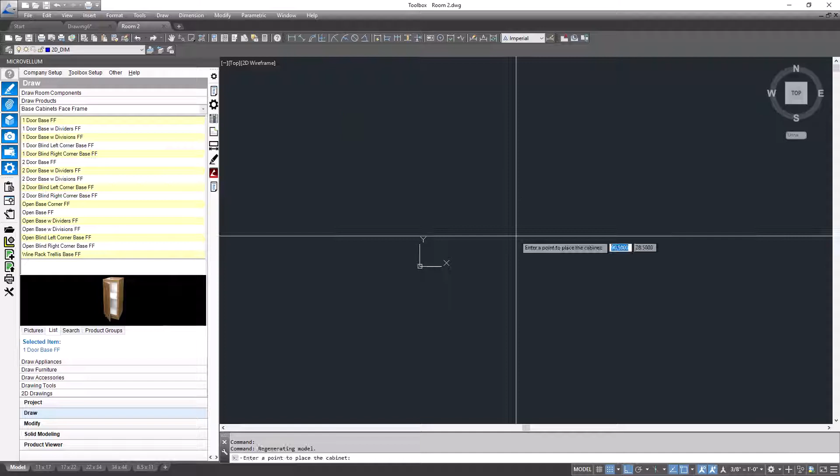And on this cabinet, we have the ability to control all the details of the face frame as far as what type of construction it is. In this case, I've chosen a routed bead face frame, so we can do just a square face frame with the edge, or in this case, we'll put the bead on there.

We can do a radius, and that could be customized with additional moldings and options for those face frames as well. So here we can see our face frame overlays as far as where we're lapping this cabinet. We've made everything flush to the inside of our case here, and we've got our stile and rail widths for those that we can control and set the details for.

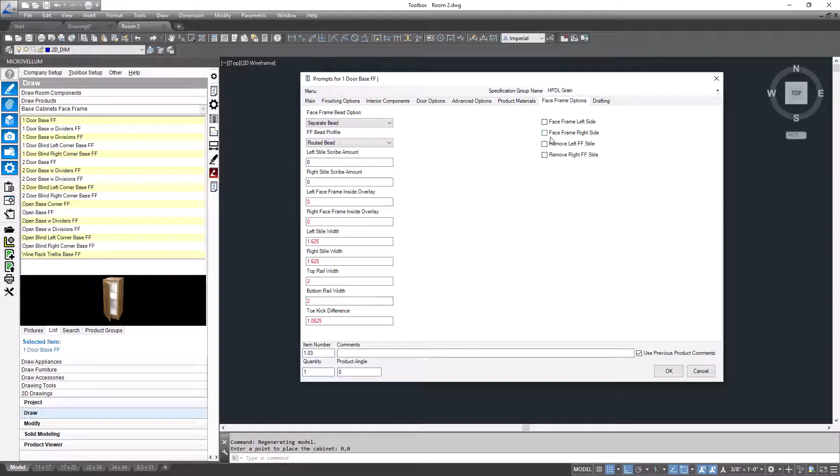So when we go draw that, we can see we've got our face frame drawn here with our cabinet and our MDF door inside of that, and so all of that can be designed and machined inside of Microvellum.

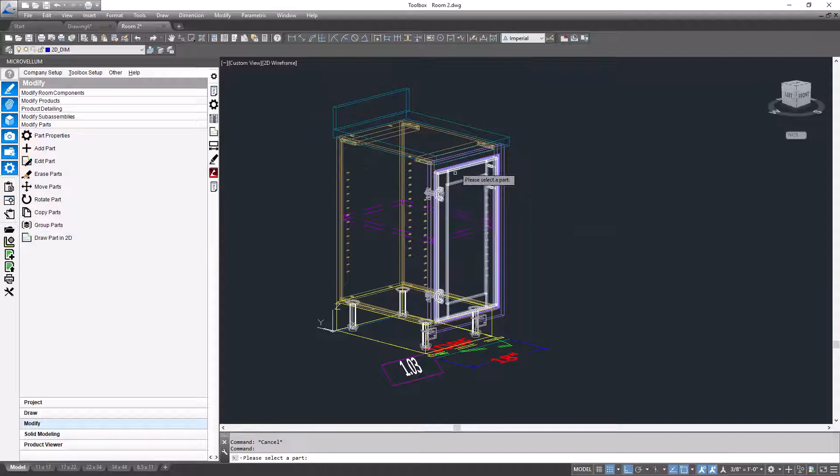So if we want to see exactly how that's going to come through into the CNC, we can just grab that part. So here's our one-piece face frame, and here we can see we've got a cutout, and then we've got two passes for the beaded frame. And there's a detail of our beaded frame there, so you can see we're coming in with a veining bit in order to cut that bead profile into the MDF.

So we can use that same application for a single cabinet or for a multi-carcass starter. So here we have a category of product starters, and those are just openings that we can use. And in this case, we're going to use a multi-carcass to use individual boxes with one large face frame on the face.

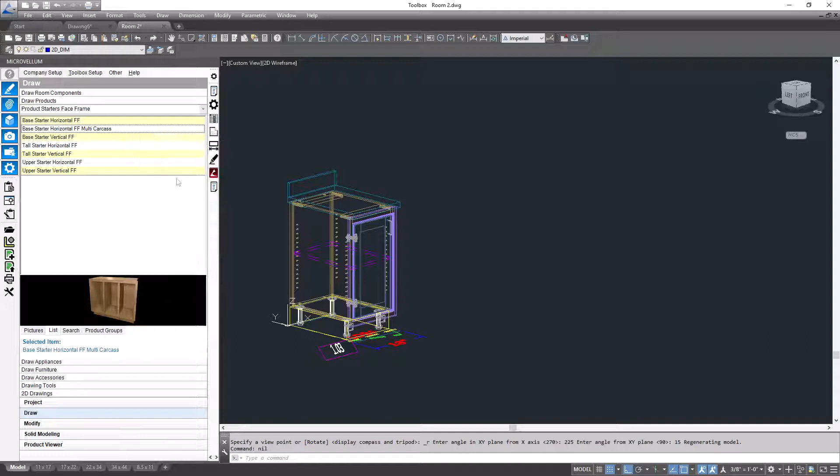And so inside of this product, we can specify as many different bays as we want. So we can do something like a 108 inch, 9-foot face frame if we have the material for that. And we'll say that it's got 4 different bays, and we can come in and specify in each of those bays what the detail is that we want to have in there.

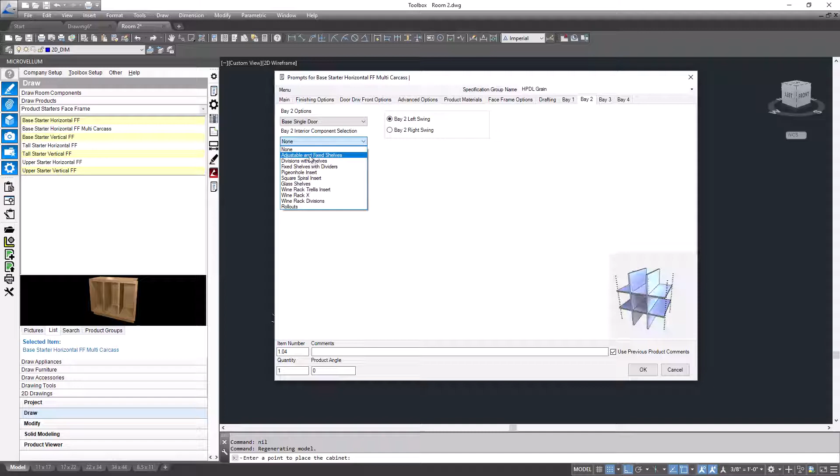So if we say we'll go with a 3-drawer with 1 rail in the first bay, and the second one we'll say it's a single door with some adjustable shelves. Our third bay we'll say it's going to be...

We can choose any of the options here. So we'll say this is a 2-door sink face with a false front and 1 rail in between, and we'll put some adjustable and fixed shelves in there. And then in our last one, we'll say we can put in a 4-drawer with 3 rails there.

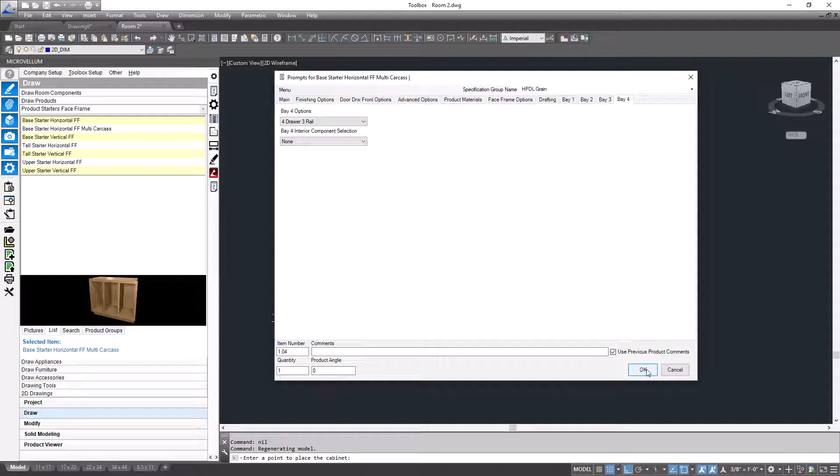And so we can go ahead and draw that cabinet. And so there we can see we've got our cabinet drawn with all of the face frame components, with the individual rails or 1 rail between a couple of drawer fronts, all the details in there.

And this is still fully parametric as well. So if we look at that and want to adjust our opening sizes, we can come in and do that as well. So if we say we're going to go and make this a 30-inch bay, this one door will make an 18-inch opening. The third one will make a 36, and we'll just make that whatever's left there.

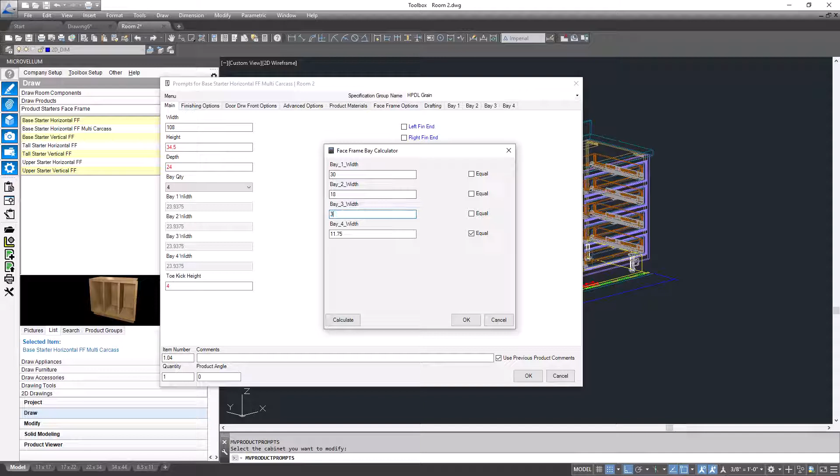And so maybe a little bit, we'll make this a 30. I'll just calculate that again, and that looks good. So then we can go ahead and draw that.

And so there you can see our updated cabinet with our full one-piece face frame there, so we can have a look at exactly how that's machined and the details around that particular piece, and give us all the details we need for that face frame.

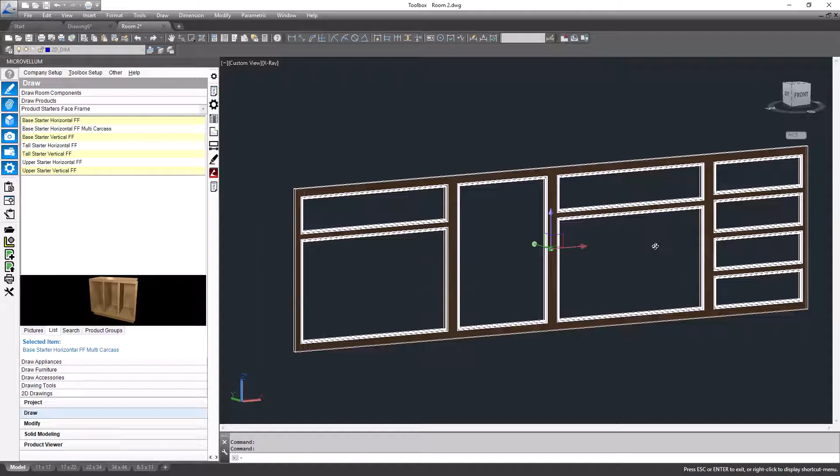And so then we can take that and process it out for manufacture as well. So we can do that by creating a work order from our products here, and we'll process those out.

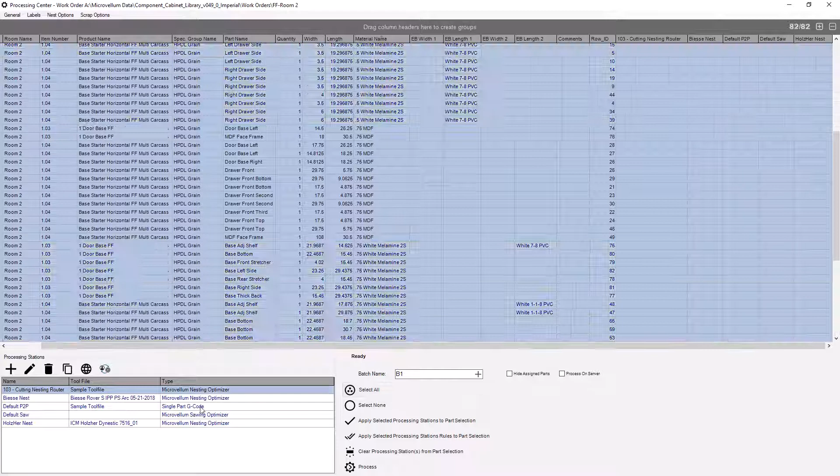And so here we've got our processing center with all of our parts and materials. So you can see we've got our MDF doors as well as our MDF face frame. So we'll just apply processing stations to all those and process those out. And if we want to look at our nests, we can open that drawing.

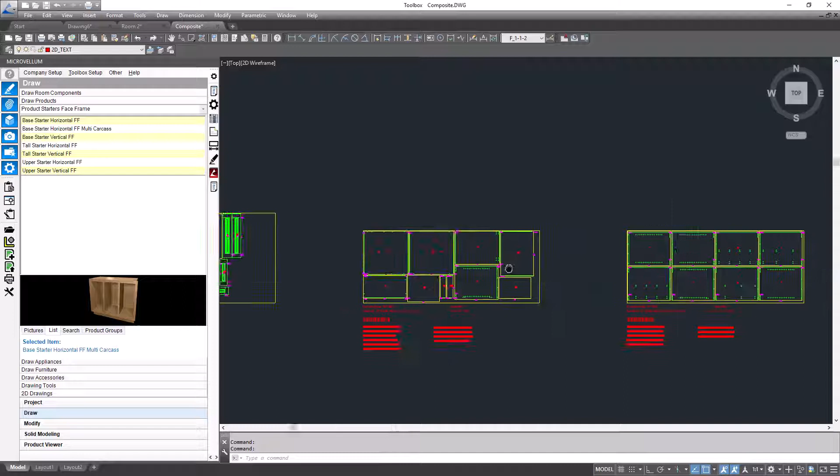And there we have all of our cabinet parts ready machined, as well as our MDF face frames and doors. So there we can see we've got our face frame for that single door cabinet, and then here's our face frame for the series of boxes, as well as our MDF doors ready to machine.